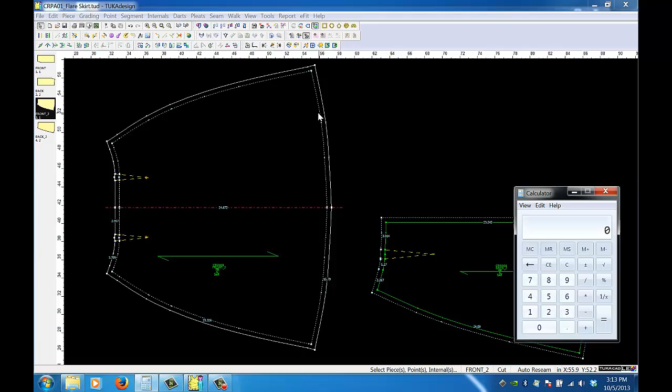To create a straight waistband, you need your calculator up, and you need to be able to measure both your front and your back. Important thing is that the outside line here, the solid line, should be on the inside. So we want to take all of our pieces and say switch all to sew, so that again the solid line is on the inside.

Now I'm going to take the tape measure and I'm going to select the piece in a clockwise fashion up at the waistline, and it's going to give me a couple of different measurements. It gives me segment and it gives me D, and I want segment. Segment is the length of the line that I just measured with the darts closed.

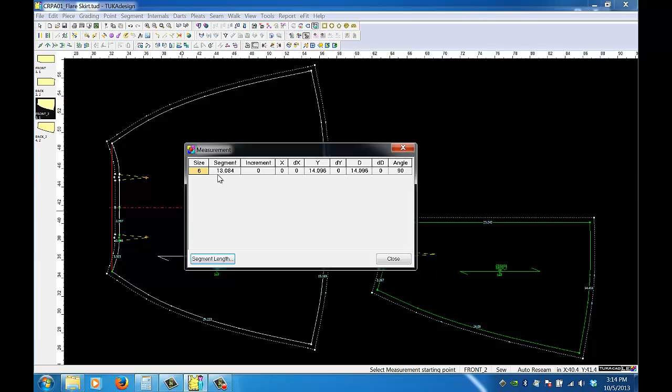So you're creating a waistband, and if you're thinking about sewing it, you will have sewn the darts shut, and then after you sew them shut, you're going to attach your waistband. So I want to use segment. So I'm going to go to my calculator here, and I'm going to type in the amount for segment.

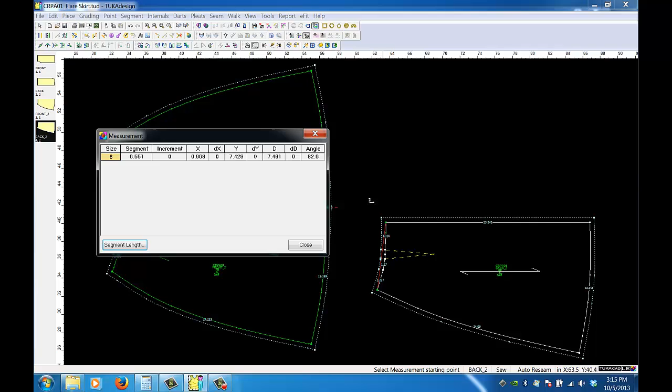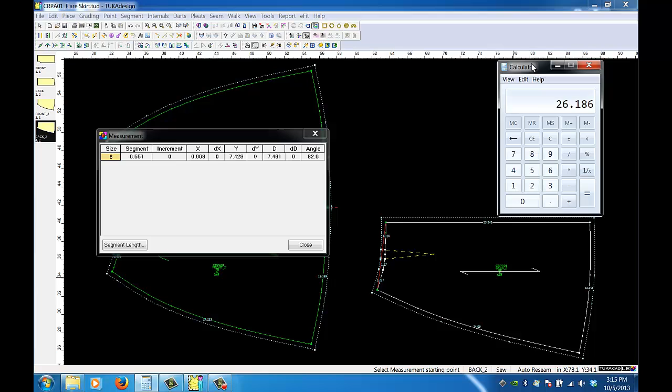Now I want to add my back, and so I'm going to measure the back again in clockwise fashion. Segment is giving me 6.551, and so I'm going to add 6.551, and I'm going to add it again because we have two backs, and so I'm going to get 26.186.

Now if you're referring to the textbook, it says that a waistband should be a ½ inch smaller than the measurement of your waist. So I'm going to subtract 0.5, and I'm going to get 25.686. So again, that was my waist measurement minus a ½ inch.

Then the author goes on to talk about the overlap, and so with an overlap we are talking about a button and a buttonhole to go in the back of your waist. So if you're thinking about a design where the zipper is going straight up through the waistband, you are not going to create an overlap. But I'm going to show you how you do this with an overlap.

So I'm going to go ahead and add 1 inch for that overlap. So I'm going to get 26.686. So now I'm ready to go. And I'm going to select my rectangle tool, because basically a waistband is a rectangle. I'm going to call it a waistband.

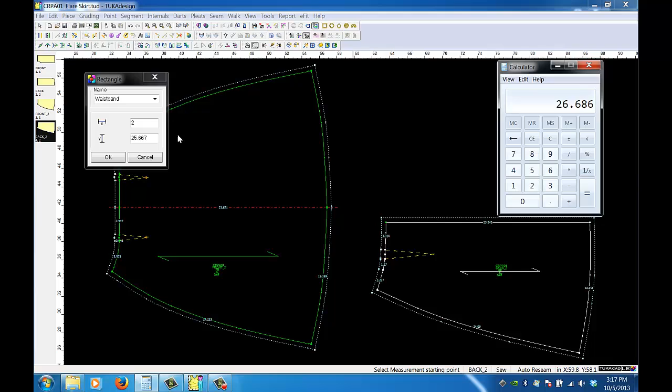And my X direction, or lengthwise direction, should be double the width of the waistband. So the book has 2.5, but right now waistbands are a little bit narrower, so I'm going to select 2. And then I just want to double check to make sure that I have my amounts right. I don't, and so I want to put 26.686 right here for my Y, and then here I have my band.

So the next step that I want to do with the band is that I want to add notches. So I'm going to come up here to a new tool. Hotkey is N. The first notch that I want is where the overlap is, and so I'm going to select one of my long line segments. Click on the line, and it says from previous point. So again, it's thinking clockwise. I want it to be 1 inch.

And I just want to double check that it's the right type of a notch. For woven fabrics, it should be a slit. For knit fabrics, it should be a castle. And so we are going to use the slit notch. 0.25 is fine for the depth. And then I want to put on grading point, because I want to add a grading point to where my notch actually is. Go ahead and click on OK.

Then the book has to place a notch at the center back seam. And so I want to click anywhere towards the center. And if you remember from math, proportional is referring to a proportion or distance from an edge, in this case, distance from the grade point. And if I put 0.5, that's a halfway point. So it's halfway between this grade point or notch and this point, which will be my side seam. And I click on grading point and click on OK.

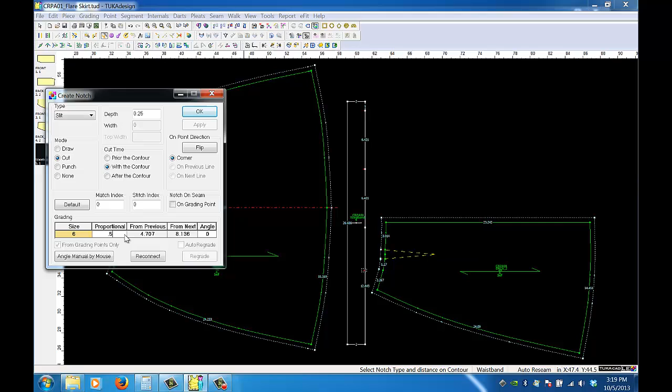I'm going to do the same as per the instructions in the book, and again put 0.5 at a grading point, and 0.5 and add a grading point. Now keep in mind, many companies do not like the use of excessive notches, and so they may say that a waistband should be put on without any notches at all, so just keep that in mind.

The last thing is that I want to add my seam allowance, so I go ahead and I select my sewing machine, I select one of those points there, and I go ahead and I select 0.5 for all the way around. Again, a company may prefer to trim and have a portion of the waistband, if not all of the waistband, be 1/4 of an inch.

So that can be a company rule, and that would be noted in the pattern card instructions. So that's it for your waistband. Just make sure that you check your labeling. So I'm going to go ahead and move that piece off to the edge. I'm going to go ahead and save it.

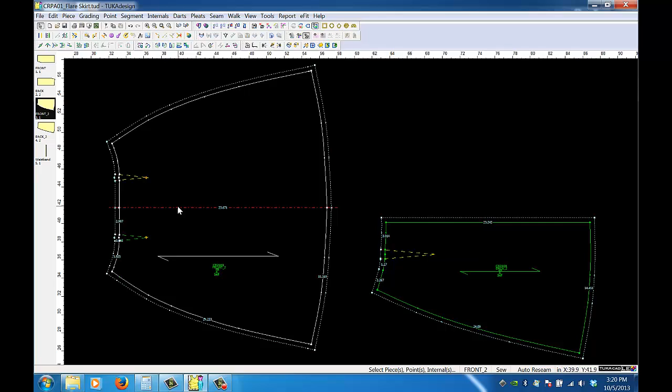And now I'm going to show you how to do a facing. So again, you would have a waistband or you would have a facing. You wouldn't have both to finish your skirt. So to create a facing, I first want to place my pattern piece on the half. So I only want to see half in order to create it.

And then I'm going to use a new tool here. I'm going to select my waistline. I don't have to measure, just select the waistline. And then I'm going to select the Create Parallel tool. So Create Parallel, and it asks for the distance.

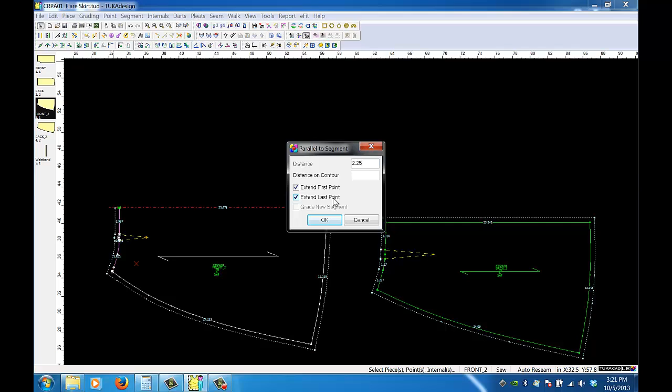So a typical distance for a facing is 2 to 2.5 inches. So 2, 2 1/4, 2.5 inches. And so I'm just going to go ahead and make mine 2 1/4. The book has 2.5. Again, it can vary. And I do want extend first point and extend last point. That's just going to basically stretch the curve line to fit.

And then I'm going to go ahead and click on OK. So you see that that line went all the way to the edge. And go ahead and click yes. Okay. Good idea to get rid of extra little grade points that it may have created, so as to not confuse your next step, which is going to be closing and removing some of the darts there. So I'm just going to get rid of a few points to sort of clean it up, like I had an eraser.

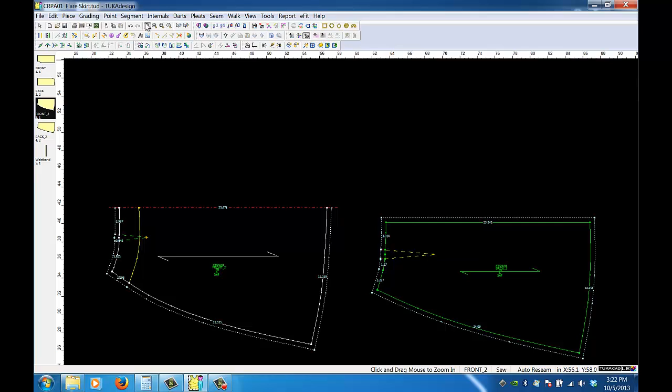Okay, so now I have my facing shape. Then the book talks about tracing off this piece. And so we're going to actually do the same thing in our CAD program. I'm going to zoom up here so that you can see closer. And I'm going to use the Trace Segments tool, or Control I as the hotkey. And I'm going to select in a clockwise fashion.

And select my lines here. Make sure that you select in between grade points. And select my front line, and then I've got my piece. I use the select tool, and I have selected and traced my piece. Once I've traced it, I now can get rid of this draft line. I don't need that and don't want that in my final skirt piece. Just needed it to create my facing.

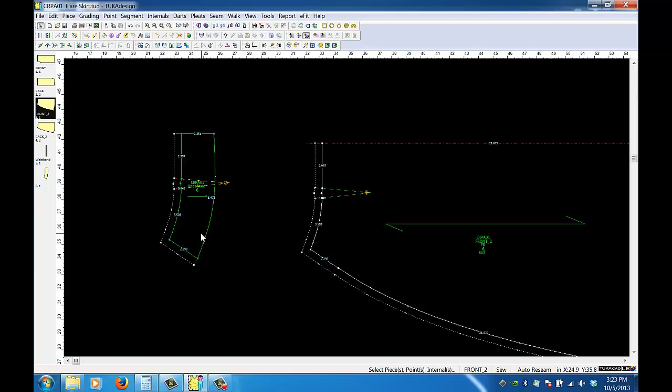Then what I'm going to do is select the dart. So I've selected the dart, and now if you're taking a look at the book instructions, it says to close the dart. In manual pattern making, you would slit along this line and then you would match the other leg. So I'm going to essentially be doing that. I'm just going to be clicking on close dart. So now I basically slit and taped it in place.

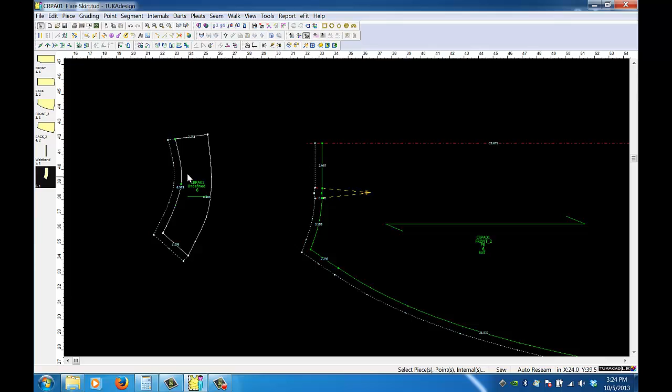Then I'm going to get rid of this dart image. So I've gotten rid of the dart image, and then I can smooth it out by again deleting some points or making points curve points and non-grade points, making sure that it's nice and smooth. It looks like it's dipping down a little bit, so I think I will first try just getting rid of this point. See if it smooths out my shaping. Yes, it does. So the facing should be fairly even there. So there's my front piece, almost.

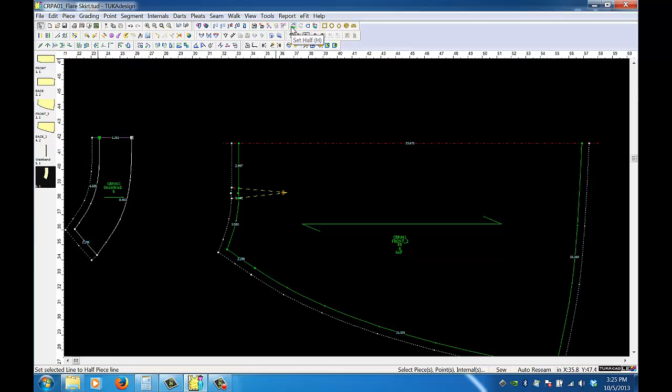Then a facing grain line should be matching the center front, so it should be parallel to the center front. So I'm going to select the center front here, and I'm going to say grain line parallel to segment and rotate to grain line. So now it has straightened up my piece and it is ready to be opened. I've already selected my center front, and so by selecting my center front, I then can say set half and then view half.

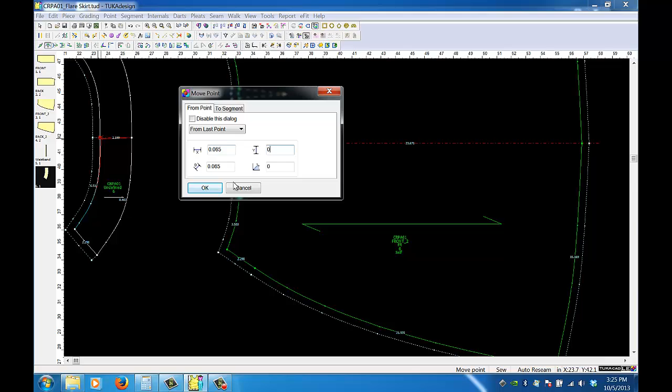And it looks like it's dipping up just a little bit, so I'm just going to trim things just a little bit and get a little bit better shaping there. And so again, just shaping it so that it's a little smooth.

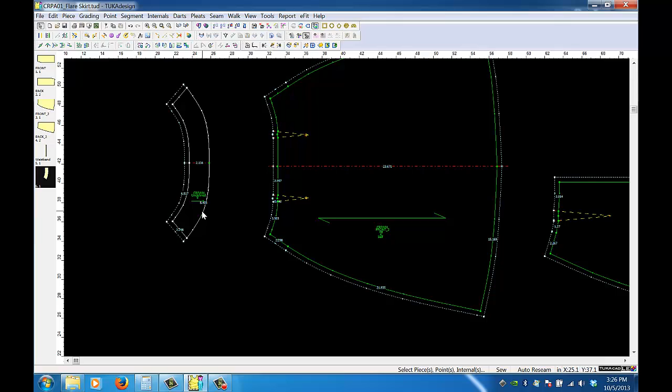The last step is to add a seam allowance to the bottom edge, and depending upon how you're going to finish this, whether you're going to sew it to lining or whether it's just going to be a finish, dictates the width of my seam allowance. So if I was just going to leave this and not have a lining attached to it, then I'm going to select my piece, bottom edge, clockwise. I'm going to select the sewing machine tool.

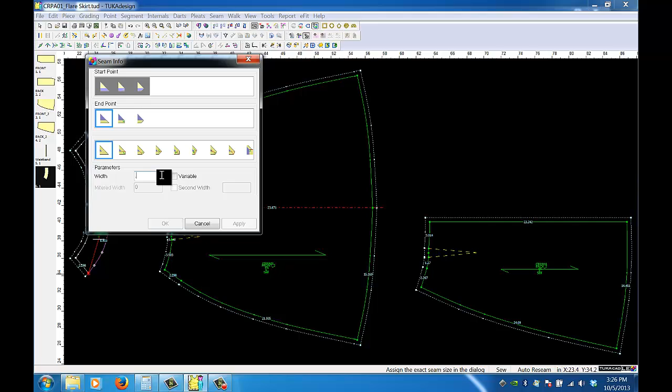And I'm going to make that 1/4 of an inch. Again, some companies may cheat a little bit and just do a raw edge without the seam allowance, saving a little bit of fabric. There you go with the front, and you would do the same to the back.